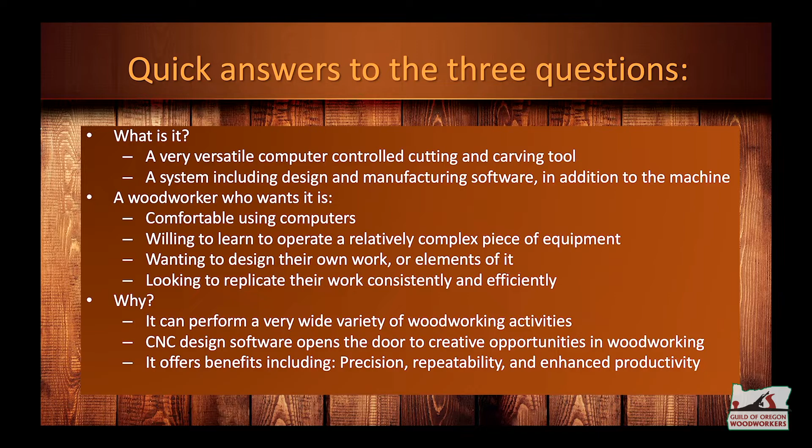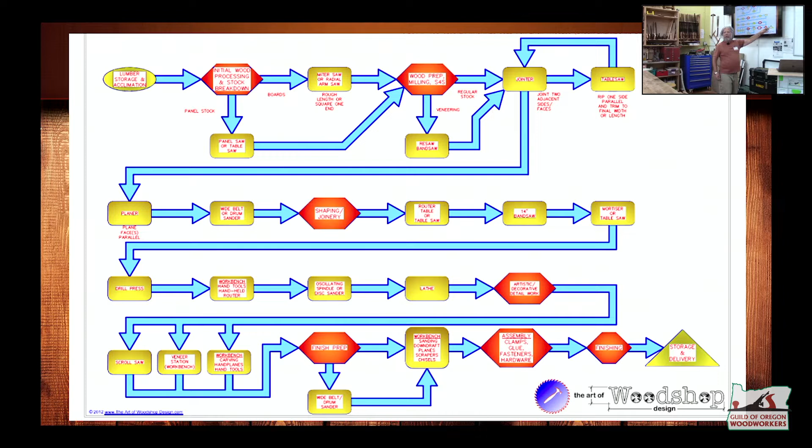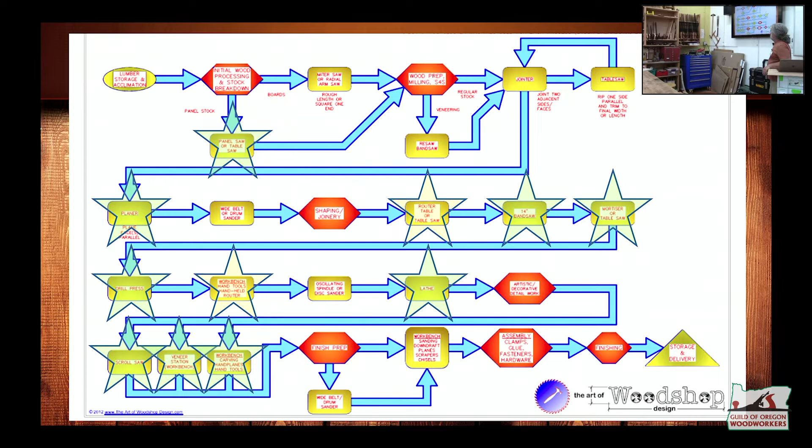Cool, right? All of these places are places where CNC routing has an opportunity to add value to woodworking. This is a list of all the places where I have found, and we will be able to demonstrate, where value for a CNC router comes in.

Shaping and joinery - there's all kinds of ways that you can use CNC machines to do this. And one of the more sophisticated ways, believe it or not, is to cut dovetails.

Drilling is a piece of cake. You stick a drill-like bit in that thing and let her go to town. Those of you that have ever tried to make cribbage boards, 200 and some odd holes, you can tell me about jigs and templates and how fast and easy it is, but all you have to do is put your piece of material down, put in your program, and watch for a half an hour, and your holes will be drilled. Perfectly reproducible, perfectly spaced.

Sure, you can use it as a regular router. Those of you that have done plunge routing know what the Z-axis is all about. We're going to talk about X, Y, and Z in a little while.

And if you get a schmancy machine, like some of these guys have, with a rotary axis, it will hold a piece of material longitudinally and turn it while the carving bit comes down and operates on it. You can create amazing things, lathe-like turning that you can do on a CNC machine. We have some examples of that work that we'll show later on.

Ornamentation is where CNC routers are most commonly known. If you were to say, what's the most common application of CNC machines? It's probably sign making, plaques, trophies, things of this nature.

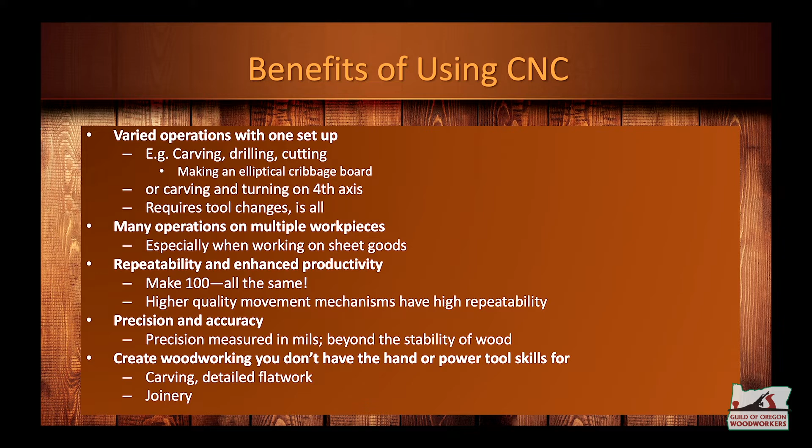The precision and accuracy of these machines, once you've got your machine set up and aligned, is better than the stability of the material you're working with. So we've got 10 times more accuracy in what we can do on the machine than the stability of the material. That, in conjunction with the repeatability, means things are going to work the way you want when they need to come together.

First of all, let's talk about the machine. We have a machine right here in front of us. First is the machine - key components in the machine.

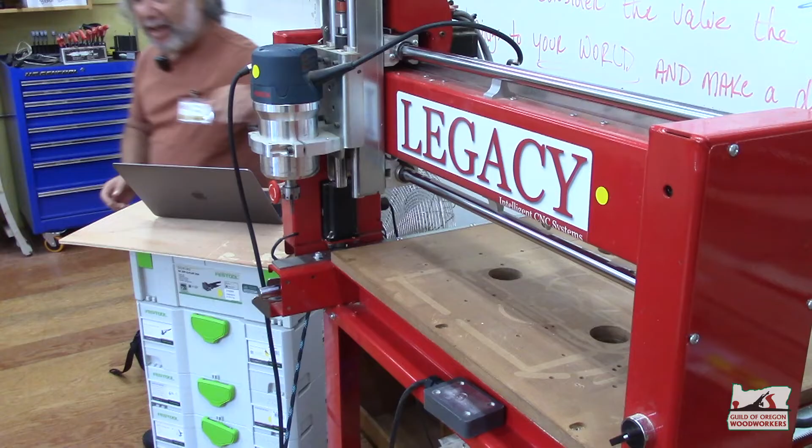You need a bed. This is the bed down here. Hiding underneath this piece of MDF, there's a solid bed that supports the workpiece. On top of that, we put a spoil board.

Most machines use stepper motors, these contraptions up here, in order to drive the axes. We've got one here for Z, one here for Y, and another one hiding in the back for X. Some machines have 2 stepper motors to move the gantry back and forth, and those steppers need to stay in sync because it's a heavier piece of stuff that they're moving around.

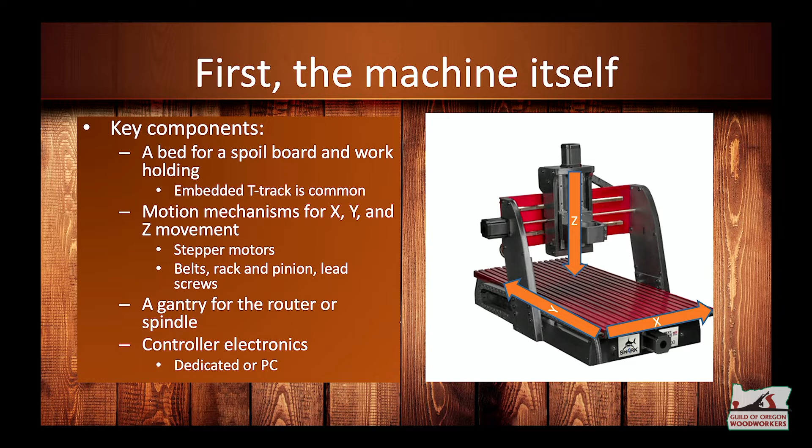The gantry is the thing that holds the cutting device. So this is the gantry all across here. This machine uses a router, a Bosch router. Higher-end machines will talk about spindles, liquid-cooled, for production work. But for low to mid-range machines, a router like this, a couple of horsepower router, is the typical bit that's running it.

And then you need some electronics to control the gizmo. In this case, we've got a small PC that's running the machine control software sitting underneath it. None of the software that we're going to talk about requires particularly high-powered machines. Standard desktop PCs, this little mini PC, is all the machine control stuff needs.

So this is one of the CNC machines offered by Rockler. The brand name is Axiom. This one has a 24 by 48 bed with 6 inches of Z. That's typically about what you get, 6 or 8 inches, something like that. There's usually not a heck of a lot of Z.

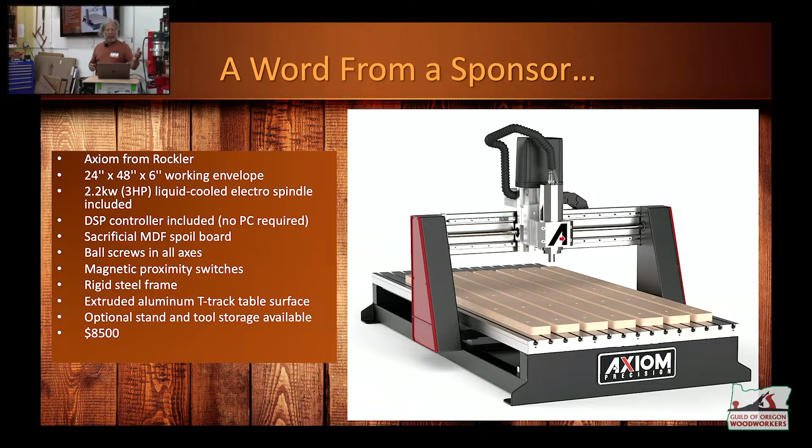It's a higher end spindle. You can see it's liquid cooled. It doesn't require a little PC. They've got a little embedded dedicated computer that runs the machine. They use ball screws, which is typical for a mid-range machine.

So the machine that we're still talking about here has T-track for its table. You can see the T-track down here, very handy for clamping down material. Optional stand and storage, and it's an $8,500 machine, which is kind of a mid-range price for some of these guys.

Craig mentioned that there's a new machine on the way. This is a picture of what that is. It's got a 3 by 5 foot bed, so it won't handle a whole sheet of plywood, but it'll certainly handle some sheet goods. It's a beast. These legacy machines are really solidly constructed, all steel.

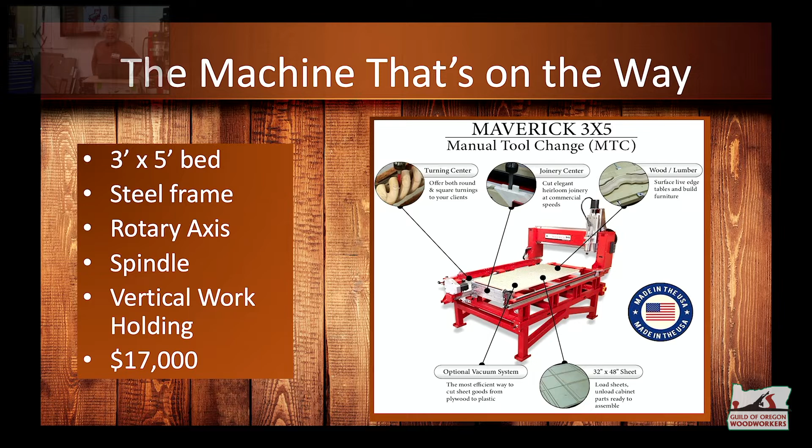On the slightly other end of the spectrum, but one of the more popular, let's call them hobbyist machines, is the Shapeoko.

How do you decide what you need? Well, there's a lot of different factors. If you're a pro, you're going to use this in professional work. You're going to want something pretty reliable, because when the deadline comes and the router motor burnt out because you used it too much, that's going to be a problem. So maybe a spindle will give you more of the reliability that you're looking for.

The bed size, as we talked about, is really important. If you use sheet goods, you're going to want a big bed, no question about it. But if you're doing boxes and signs and ornamentation, I haven't yet reached the limits on my 2x2 bed that I've got on my machine. I'm perfectly happy with that for the time being.

What do you want for a work surface? Everybody's got to have some kind of spoil board. I have found that T-track is a very common option on the machines. You get to use clamps and stuff like that. Although a lot of the work holding that I've done, I've been using double-sided sticky tape. Works just fine. Tracy Ann uses blue painter's tape and CA and accelerant.

Works for her. So we'll talk a little bit more about work holding, but thinking about what kind of material you're going to have and how you're going to hold that sucker down is something to consider. Rotary axis we also mentioned.

If you're interested in turning but you don't have a lathe, it's great for making legs, canes, as we'll see, any type of material that you would typically imagine cutting on lathes.

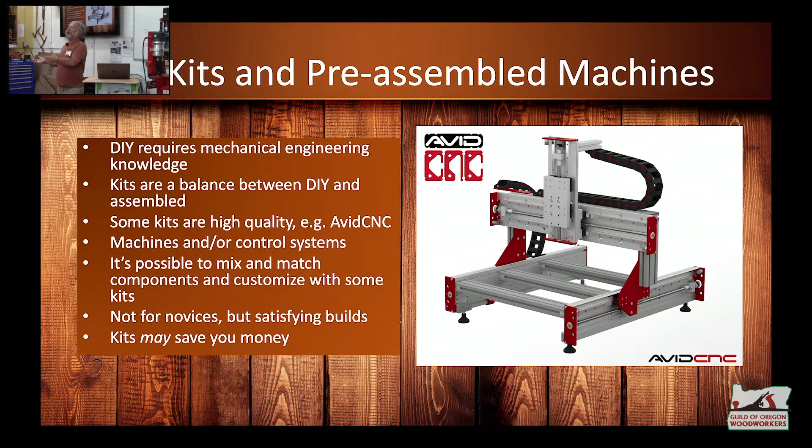Okay, let's talk software. This is the fun part. So, first I would say, there's 3 main components of software that you will use on your CNC work. The first is doing your design. You can draw it, you can create it in a variety of ways. We'll talk about some of the different kinds of software, examples of that software that we're going to use, but this is where you're sitting down at your desk, you got something in mind about what it is that you want to make, and now you have the opportunity to render that in your software.

And what you end up with is typically 2-dimensional drawings of the work that you're going to produce. Well, that's great, but now you got to make it. So now we need something that's going to convert that design, those plans, into instructions that can move that bit around and have it make what it is that you want it to make. And that software is called the CAM software, computer-aided manufacturing. And that software's job is to do just what I described. It basically takes your drawing, could be two-dimensional, could be three-dimensional, and turns it into cutting instructions for your machine.

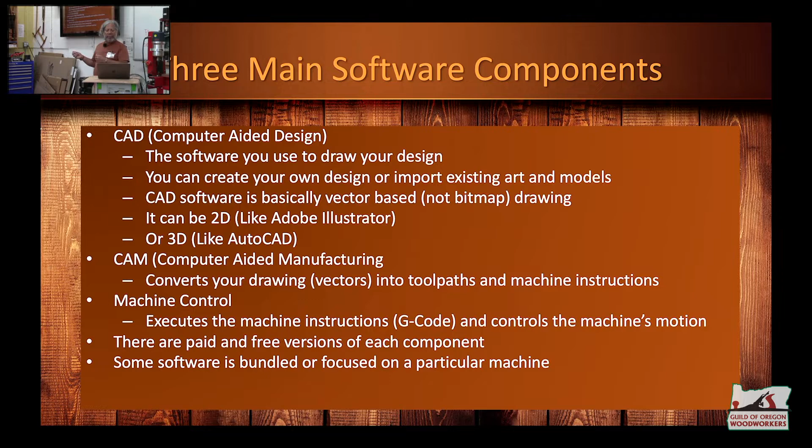Critical piece. The output of that is a script, a program. And the program basically says, take the head and move it down here and move it over here and turn the thing on and cut it over here and go back and forth a few times like that and then drill a hole and you're done. That's kind of the program, the script, if you will.

We take that script that comes out of the CAM software and load it into the machine control software. That's the stuff that's running on that little PC that's under the machine right now. And that's the software that will then tell the steppers and the router and the spindle what to do to make your part. Bing, bang, boom. It's just that simple.

If there's one slide in this presentation for you to wrap your heads around, this is it. And this is the part of the presentation that I struggled with. How do I give an overview of what this process is like? This slide is the best I've found. So let's go through it a little bit.

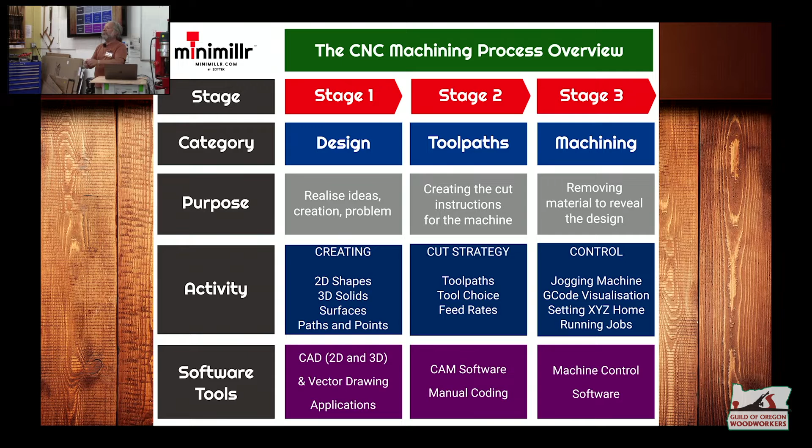It's 3 stages. We kind of highlighted them with the 3 different categories of software. In one case, you're going to do your design. Stage 2, you're going to create your tool paths. The 3rd stage, you're actually going to cut your work. You can see what the activities are, creating the cut strategy and the control of the machine, and then the different categories of software that you use. This is the basic process for how you do stuff on a CNC machine.

The notion is there's 2D, 2.5D, and 3D design. What the heck is 2.5D? Is this like an Einsteinian thing? No. 2D is when you create a design and all the cut levels, the depth of the cut, is all the same. In some cases, like if you were doing engraving, you might actually go all the way through the material and cut it out. That's 2D design. What is this 2.5D thing?

The 2.5D thing exists because 3D is hard to design. You got to think in 3D. You got to draw in 3D. You have to use 3D design tools like SketchUp or Fusion 360 or AutoCAD or complicated stuff. If you have that interest, if you have that background, if you have that ability, you can create fantastic things. Not everybody does. 2.5D gives you some of the capabilities that you get for 3D, but you get to design it as if it's 2D.

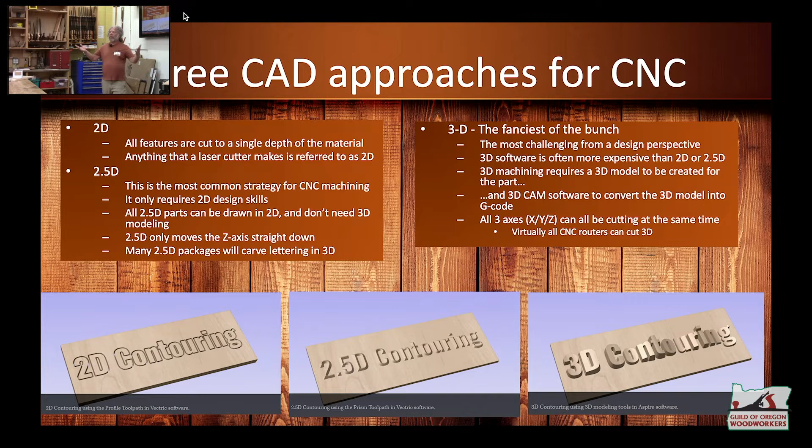My advice is start with something like this in the world of design, get some experience with that, understand your machine and how it cuts, and if you want to do 3D, it's awesome because it really opens up the world of possibilities. You can make anything then.

Some examples of 2D, 2.5D software. Carbide Create is an example. It's the stuff that comes bundled with Shapeoko. It comes for free. It supports some other CNC machines as well, but they really focus their connection between the software and the hardware on Shapeoko hardware. But if you wanted to download a version of it and check it out, you certainly can.

Vectric V-Carve. Who uses V-Carve here in the shop? V-Carve Pro, V-Carve.

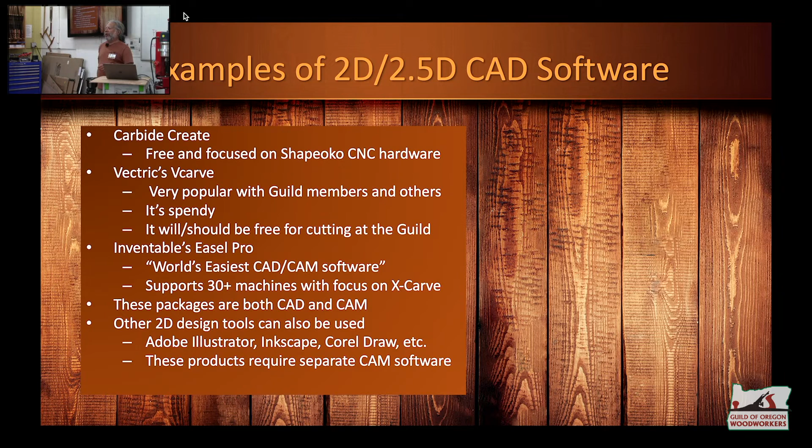Okay, yeah, and Aspire. The first thing I learned when I started to get into this was what software people are using. First of all, Vectric is the brand. It's an English company, it's very mature. Their software is in version 11. It's feature rich, it's very stable. It's not impenetrable in terms of learning how to use it. It's really cool. And V-Carve and V-Carve Pro are very popular. So if you're just getting into all this, take a look at V-Carve.

There's a free version of SketchUp that still works. There's a free version, and if you want the pro high-end thing, it's about 300 a year. So the comment is we've been talking about hundreds of dollars and $2,000 for some high-end software. That's not necessarily the case. You can do very capable work for free. Some of the stuff is free.

Inkscape, as an example, is a dandy 2D design package. It's open source, so if you're an open source fan, you'll be able to find versions of that stuff for almost everything. Blender, incredibly powerful 3D package, it's free, open source. So we're talking about commercial software, support, community, and all of that, but there's other options as well. Thanks for highlighting that.

How do you do this design stuff?

Those of you that are really good at doing design can just sit down and draw. Not everybody is able to do that or do something in a design that they'd be pleased with when they got their results at the end.

But it's not that hard. Those of you that have used any kind of drawing package know how to draw a rectangle. You click around the rectangle thing, you stretch it out, and you got a rectangle. It's not so hard. Or an ellipse or a circle or any of those objects. You can create all those things, standard drawing, 2D drawing stuff, and do it in your package.

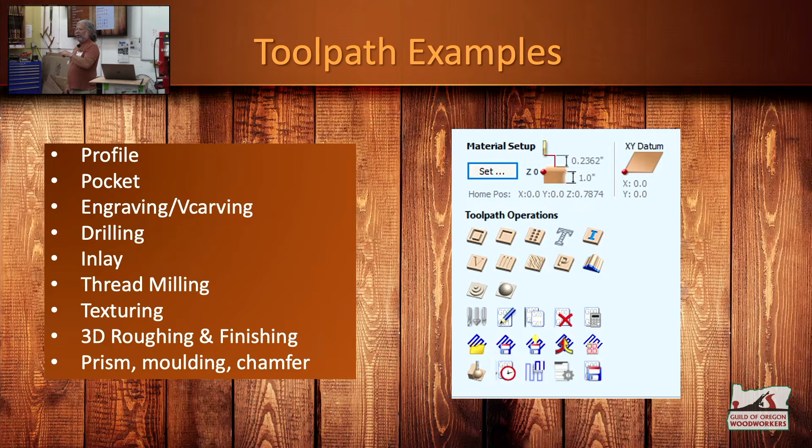Okay, speeds and feeds. We talked a little bit about speeds and feeds earlier, so now you've got a design, you're telling the tool path to move around. How fast is that bit moving around, and how fast is it spinning in your spindle or router?

There are, as was highlighted, a few different ways to do it. The goal is you want it to cut clean, you want chips, not dust, you want to maintain good tool life, you don't want to burn anything, you don't want to break your bits, you want all that stuff. And how do you do that?

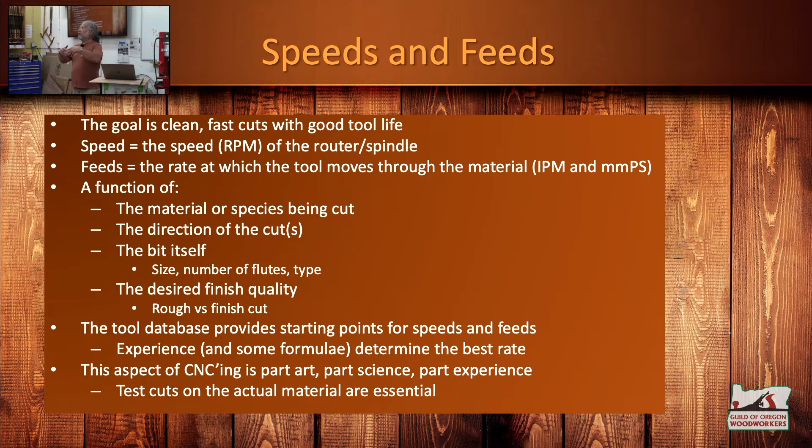As was mentioned, the tool database is a database of tools that's in both the design software and in your CAM software. If you're going to be doing that pocket cutting, chances are you're going to use an end mill. So there are conventions of which bits you're going to use. If you're going to be doing really detailed work, you're going to want tiny little pointed bits like that in order to do the detail work.

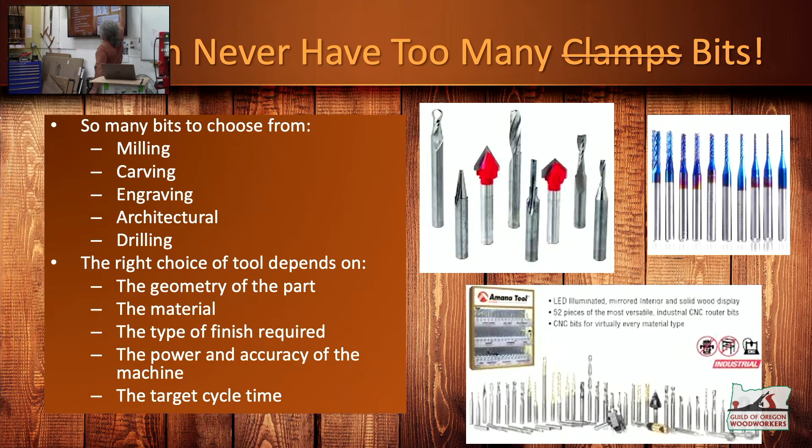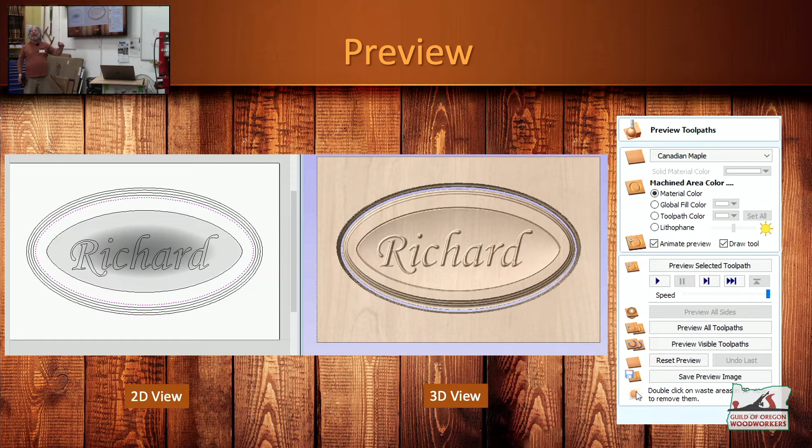Exactly, spin it all around. And, as we'll also mention, the sequence that the tool paths are cut in can sometimes be important. Tabs is an element that you can add to the design where you're going to leave a piece of material periodically, because it knows that it's a cutout piece, and it'll leave those tabs for you to hand cut and do the final separation.

Okay, last piece of software. It's almost demo time. Machine control software, the last piece. So the last thing that we did after we did our preview in our CAM software was we saved the tool paths as files on our computer.

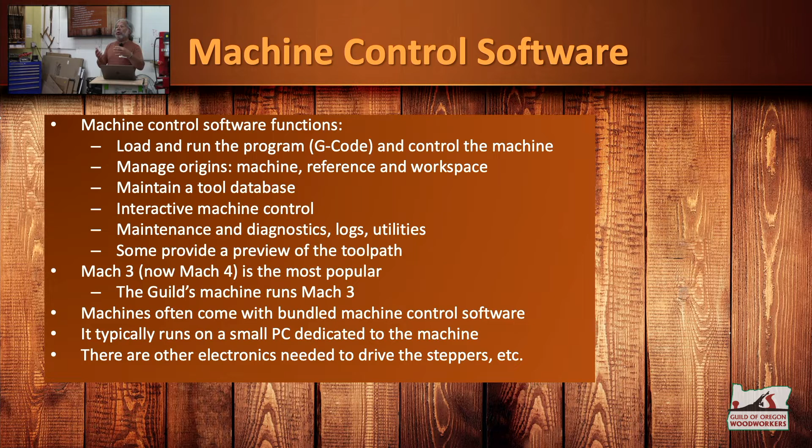Those tool paths are the script with the G-codes that the machine control software will then load and cause the machine, once you've pushed the right buttons, to execute. So the functions of the machine control software, as you can see, is to load and run that software.

There's a whole thing that goes on about setting the origins, the hardware origins of the machine, reference origins, your workpiece. The tool needs to know where your workpiece is. And that's part of the setup that Dave will take us through so you can see what that looks like.

One of the mistakes you might make is, oh, I told the design software the origin was in the middle of my piece of material, but I didn't set the machine up that way. I told it that it's actually the corner of the material. Oops, that's a problem. G-code. We won't get into a lot of detail about G-code, fortunately, because we don't have to.

The machine understands it. There are lists of hundreds of G-codes.

One last thing, and then we're going to turn it over to Dave. He's going to talk about how he holds down his work. There are lots of different techniques. We alluded to some of them earlier.

One of the things you see on preview is where the tool will start, and then it zips across to where it's going to start cutting. So if you remember that preview, you won't put your clamp in that path. Keep your clamps out of your tool path.

The workpiece must be held securely, or else. It also must be flat to the gantry, especially if you're doing particular carving. Sometimes wood tends to warp, so you've got to either clamp it down really good or give it a surface planing to make sure you get good consistency, or use the technique Dave called touch-off.

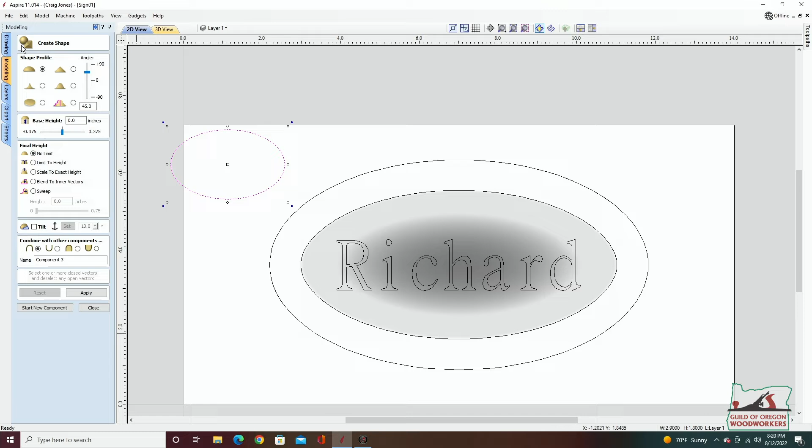I'm going to go into modeling, and very quickly choose create a shape. There are various shapes you can do - peaks, coves, roundovers, an arc. I'm going to do a very simple dish shape, just do it around there. And there is that gray area we talked about before. I can apply it and close it. Then later, when I go into my CAM side, it will take that shape and carve it out.

The best thing to do is take the V-Carve Pro and just play with it. So let's say I have defined what I want, very simple. This line will be the cutout, this line will be the dish, there's the text we're going to put in it, and that's all we're going to do.

So we're in the CAD side, let's go over to the CAM side and create those tool paths.

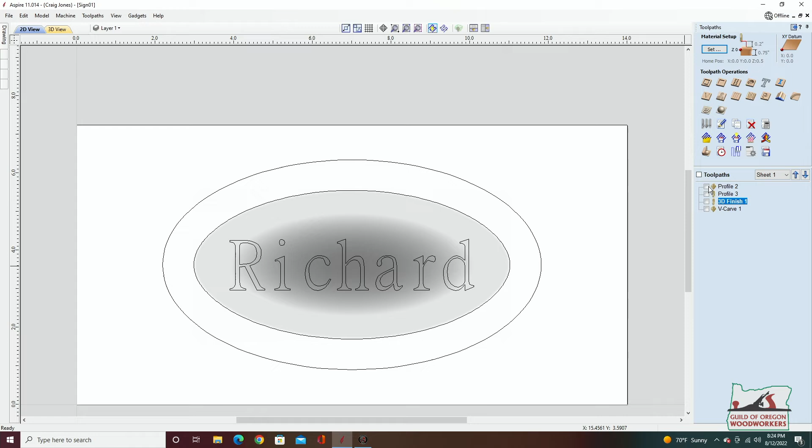I've done those for you, but I'll do them again. So you notice this big oval out here? I can recalculate each of these - double click on it, calculate it, now it's sized to the material. Or there's a tool up here that I can just go recalculate them all.

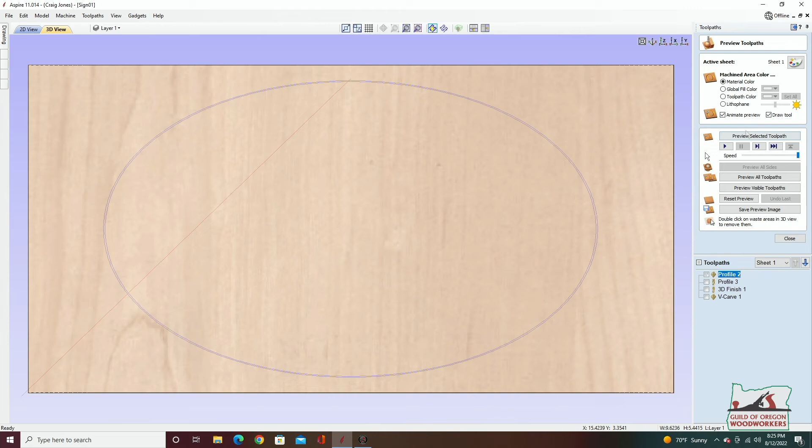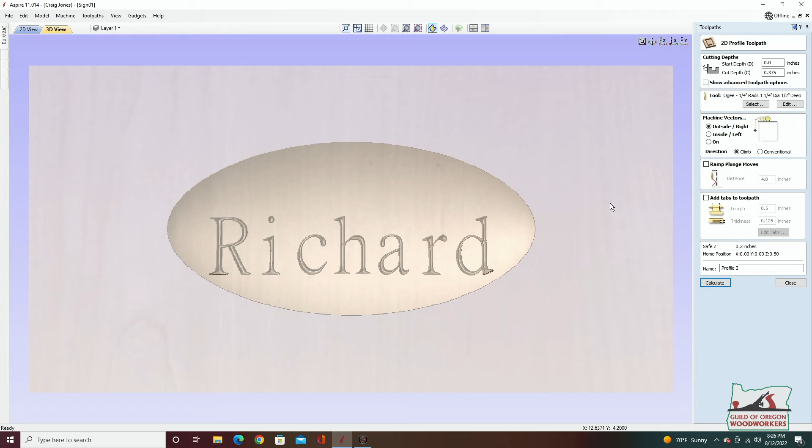One thing we can do is say, all right, here's the profile. I'm going to go in, and what I chose to use to create that shape is an ogee bit, so it creates the ogee shape. You can do it with roundover bits, ball nose bits, it just takes a lot of steps. There are great form shape bits you can use to do that. We'll leave it as is.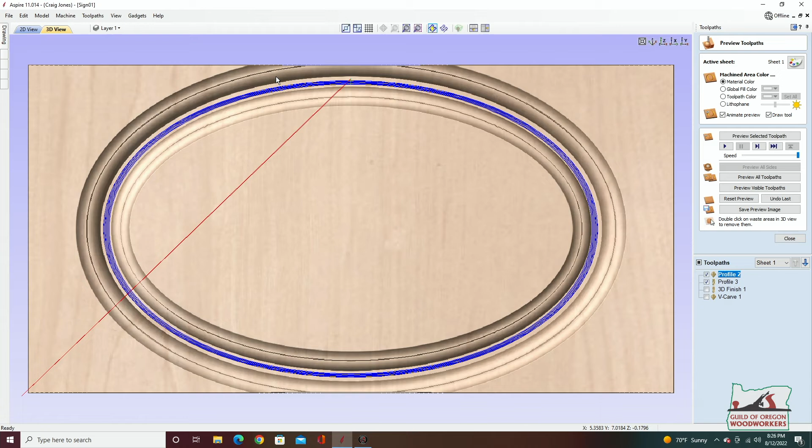And now we're talking about a cutout profile. So I've made my shape, and I want to cut out in this hollow here so that all I have left is the board and the border. I'm cutting all the rest of this away. So if I preview that, okay, you notice the blue background coming through, so I've cut through the material.

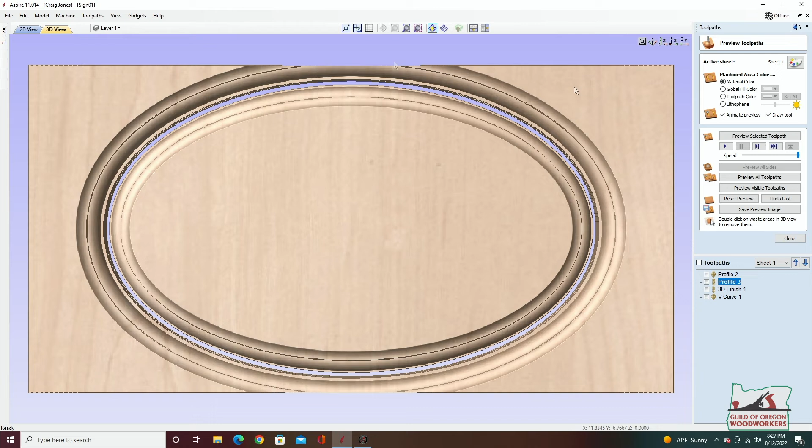Earlier I mentioned that you can start from the top of the board or the bottom of the board. If you're doing a lot of through cutting, you typically want to start at the bottom of the board so your bit doesn't go below that and cut into your spoil board. I've cut into the spoil board hundreds of times. Another thing you can do is, all right, now I've got my shape, I'm going to eliminate the excess material, and start looking at it - that's kind of what I'm trying to accomplish.

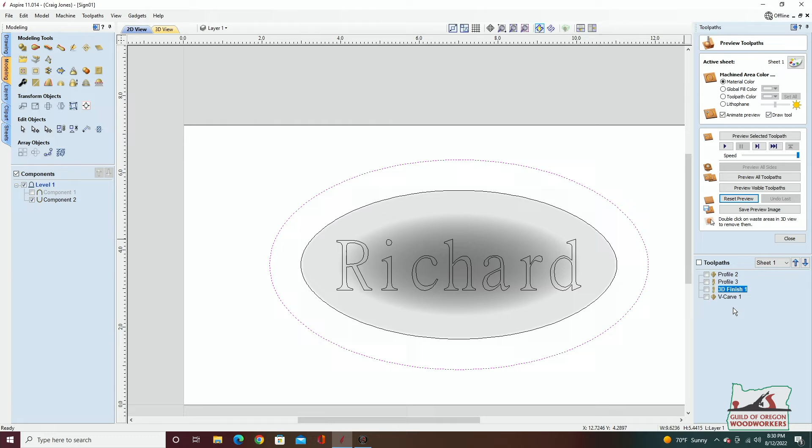So the other thing I'm going to do now is cut that dish. And what I want to do now is show a different effect of that text, which is a V-carve, which uses a V-bit, one of those red ones that Richard showed you up there. In this case, we're using a 60-degree V-bit. And if we calculate that, reset the preview and preview it.

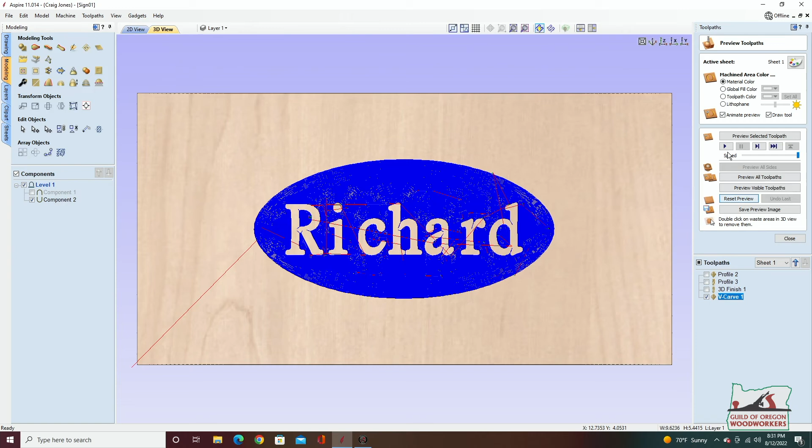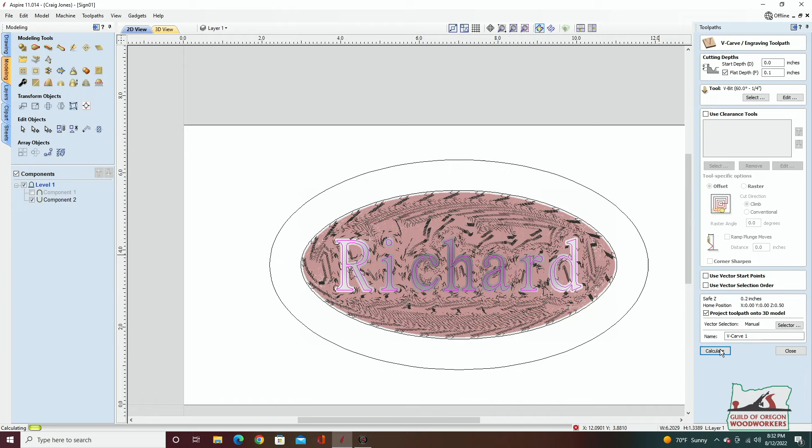Oops, sorry. Okay, that's not what I intended to do, but it's an interesting one - this thing cut the entire dish with that 60-degree bit. Come on, there we go. Now calculate it, and we'll get to just the Richard, and it V-carves the Richard. You notice the depth here is relatively deep.

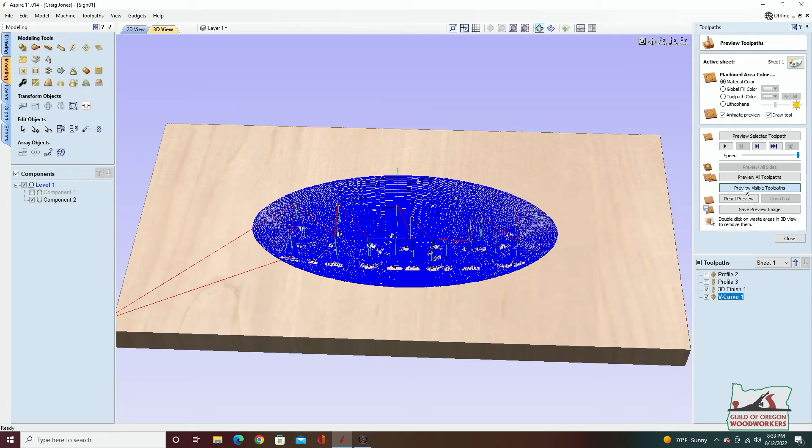And I'm going to do both of those tool paths. I'm going to reset and preview the visible ones. Then I'm going to get my dish and the Richard raised, and that sort of thing.